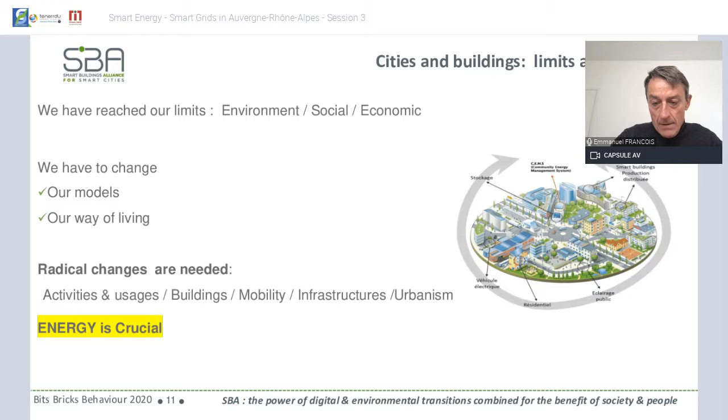In this context, digital is very important and is an opportunity. We are noticing that more and more we are going to a world which is hyper-connected, where every citizen, every building, every mobility, every territory, equipment, infrastructure are connected - not only connected, but interacting with each other in real time. And that's the most important thing, this qualifier: real time.

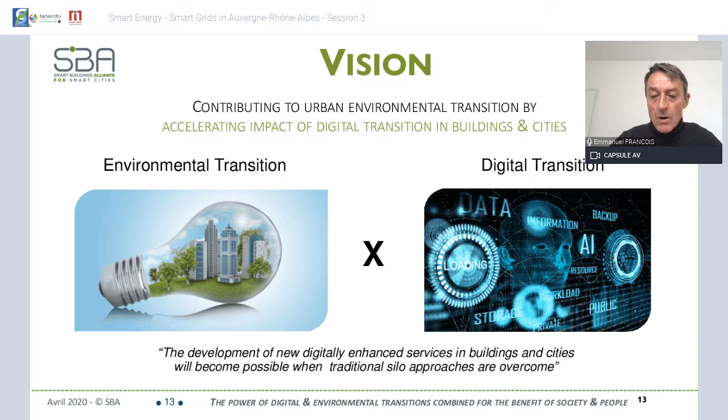Our vision is to support this digital transition and environmental transition. Therefore, we founded SBA as a think tank and also as a do tank. Today, this organization, which is almost unique in the world for its transversality, groups around 500 members in France. And within these 500 members, already 10% are non-resident in France, so that means our ideas, what we are doing, is going abroad our borders.

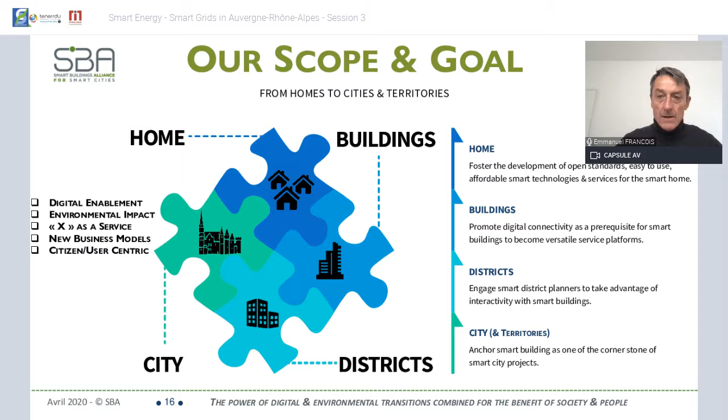So we group cities, architects, installers, equipment makers, telecom, IT, financial industry, industrial players - all these players are sitting together to rethink the building and the city of tomorrow. Our scope concerns not only homes and buildings, but also districts and cities, and how everything is interacting together and how we can rethink a better world by rethinking the building and the cities.

To support this transition, we have a strong organization with three vice presidents - one for smart city, one for smart building, one for smart home - and a general secretary, plus a management office and a board of directors. Some attendants today are also members of this board of directors, such as Frank Fischer.

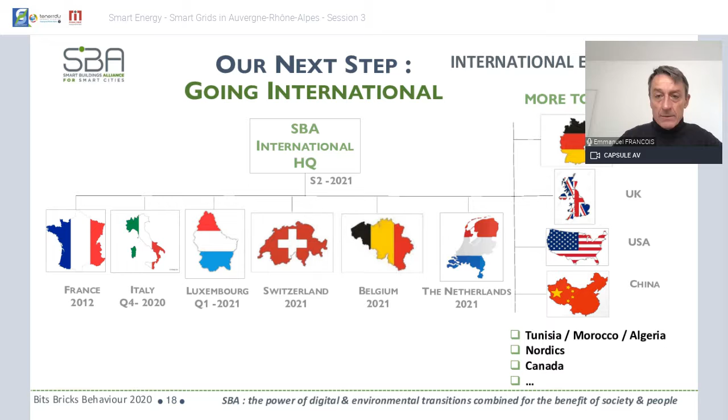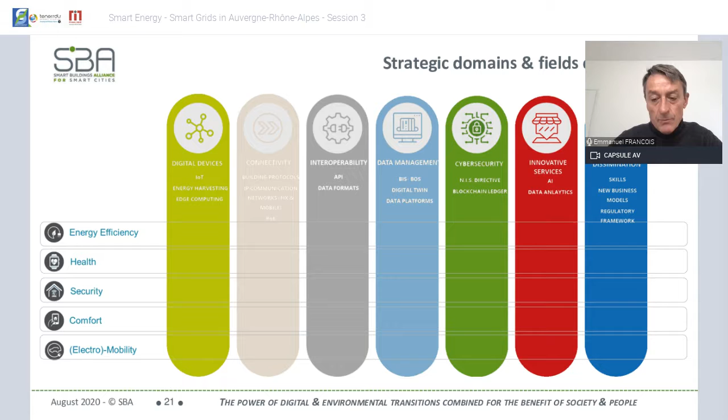But beyond that, the works and goals of SBA deal with energy efficiency, health, security, comfort, electromobility, and for all these fields we are dealing with digital devices, connectivity, interoperability, data management, cybersecurity, innovative services, and dissemination - how we can train all the people, all the stakeholders to support this mutation, this transition, which I call civilization transition.

And for this, we have set up working groups, commissions, first working on the reference framework. The most important is ready to service, and I will talk about it later. And also to work on the digital twin of the building and the cities, the operating system of the smart building and of the smart cities.

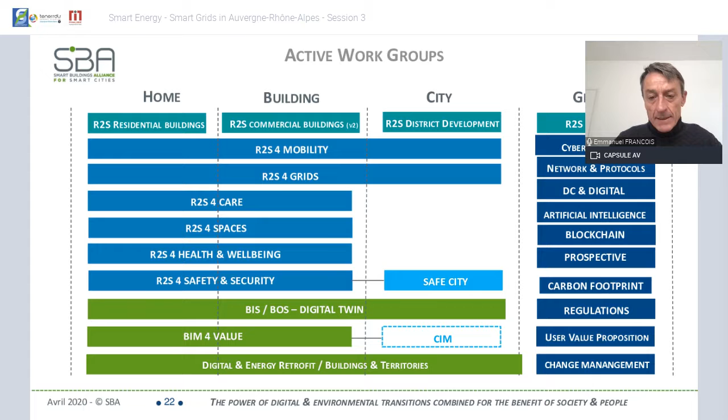Also how we can retrofit existing buildings, existing territories by bringing also digital and transversal commissions such as cybersecurity, networks, DC and digital, artificial intelligence, blockchain, prospective, carbon footprint of digital, regulation - because it's also very important that the law supports this mutation and adapts itself, and the regulations adapt themselves, user value proposition and change management.

So as I told you, we are at the origin of a reference framework which is called ready to service. Why ready to service, R2S? Because we mean that with smart, with the digital, there is a new value to consider in the building and also in the territories. This is a usage value.

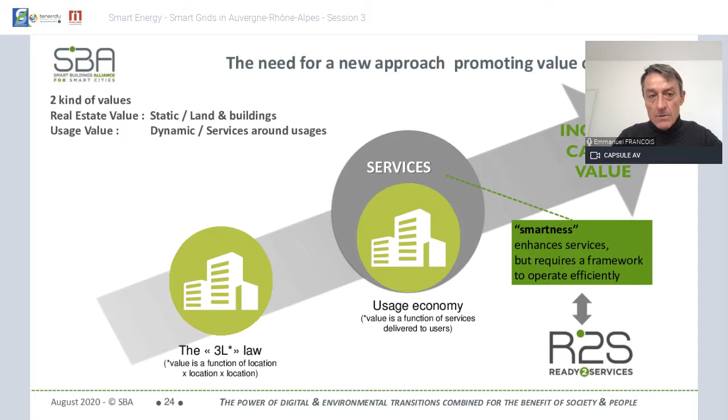So beside the real estate value, which is static, which concerns lands and buildings, you have a usage value, very dynamic, which is linked to the ability of the building and the territories to deliver new services around usages. And it means this is a new economy to adapt. This means also we need to rethink the rules, the regulations around these dynamic usages, and how to consider this value and how to evaluate this value.

So the R2S framework provides more services, concerning also optimization of operation and flexibility of usages. I will go very quickly in the description.

But the ready to service framework, the most important point of this framework is to consider that now there is a new fluid in the building, beside energy, beside electricity, gas, and water. There is a new fluid which is IP, and we need to organize the convergence of all the data on a unique infrastructure, IP infrastructure.

And then what we said also, you have three layers: the infrastructure layer, the equipment layer, and the application layer. And what is very important is that all these layers are independent. That means if you have a solution which deals with equipment, infrastructure, and application, you can remove one or two without removing everything. This is very important because today it's not always the case.

And for this, we describe how these three layers interconnect, and we describe for this purpose the APIs, application programming interfaces, which enable the compatibility and interoperability of all systems together. And we also describe how we can connect the data, how we have access to the data, and how the data are opened.

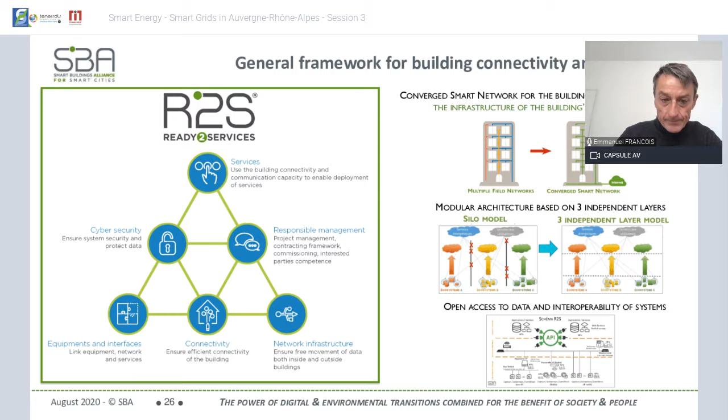This ready-to-service framework is now also supported by Ready to Service R2S Connect. We describe, as I said, the APIs.

Just for your understanding, because maybe it's a little bit abstract, take into consideration a residential building. Today, in certain cases, you have your own internet access, contracting with a telecom operator. That's what we respect. But we say now there is a new network, a network of the building, the digital IP network of the building. And this is independent of your network.

This network supports all the applications concerning the building and also the residential homes for crucial applications such as energy, water, gas, security, and why not assisted living. But this belongs to the building.

That means you can pool all the consumption of the building in terms of water, energy, also collect the data of all the users, and then integrate the building in a smart district, which you cannot do if you have separate housing with separate data and separate operators.

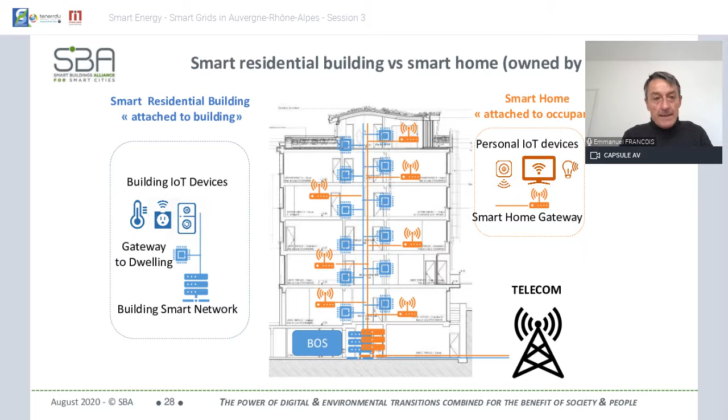So what I'm saying here is quite important and also quite disruptive. But today, as I mentioned, we already have 500 members who are supporting this mutation, and we said yes, we have to do it. Now let's do it together.

So ready to service concerns not only residential buildings, but also commercial buildings and district development. This is, as I said, a reference framework to be applied at every scale. I would say this is a digital trust framework. And of course, it exists, but it can always be improved.

At this occasion, we are already working on a V2, which will be launched this year. That's the reason why we want to share today and tomorrow with you, with other countries, in order to improve this framework so that we can be as efficient and secure as possible, and so that the management of the data becomes more and more secured, and also to ensure trust, not only for the players, but also for the users.

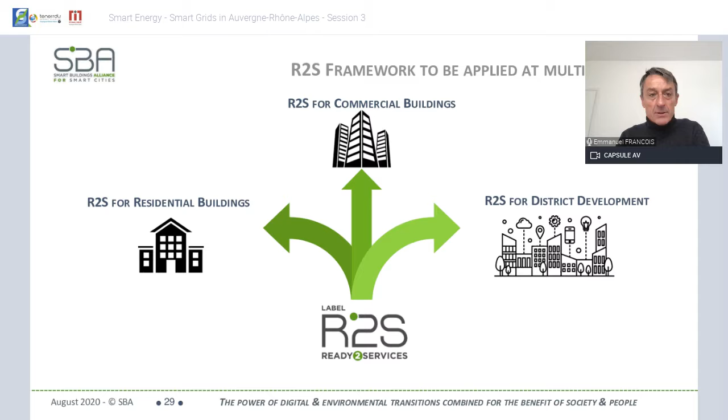When I say services, this is why we say ready to service, because there are services. And these services exist. Today we have listed several services which are key for the building, key for territories. We started with energy services, and for this reason we launched last year Ready to Service for Grids.

This is a declination of the Ready to Service framework, which concerns especially the data concerning energy and how a building inserts itself in a smart grid.

Very, very soon we will launch R2S for mobility, for the energy part, to describe how an electrical vehicle can connect itself to a smart building and how we can manage the charging point.

But also we are working on R2S for spaces, for optimization of spaces. That means a space in a building has to be mutualized, pooled within all the buildings and also within a district. And the same for safety, health, assisted living, personal care. Also, recently we will work on signage, signalization, user well-being, and so on.

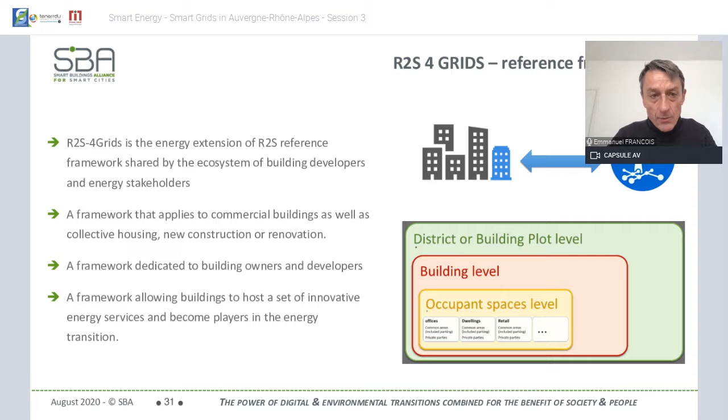So for Ready to Service for Grids, I will switch very rapidly, but what is important, we have described 3 levels of the building. The first level is how the building is connected and shares data with its environment and how we receive the consumption information. The second is how a building is reliable, meaning how the energy production and consumption data are reliable and stick to objectives.

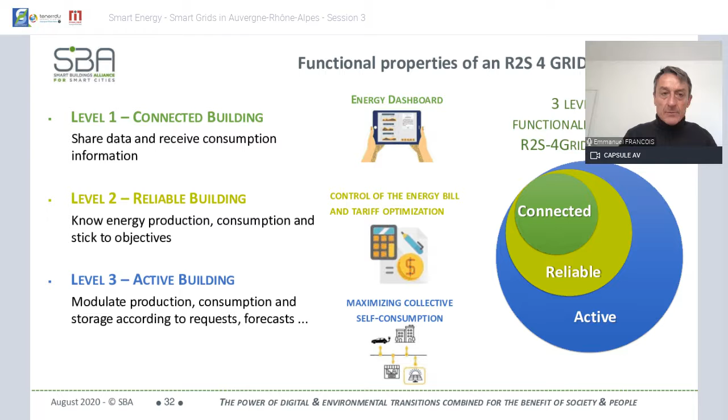And the third one is active buildings. That means how this building interacts with a smart district, a smart grid, and how it can adjust its consumption to the consumption of a district.

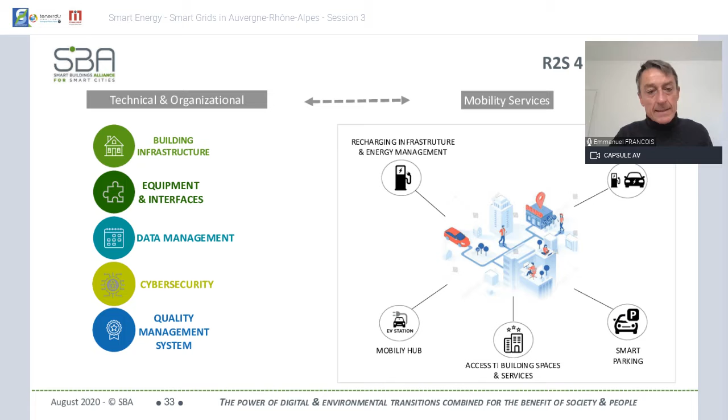Recently, as I told you, we will launch ready to service for mobility. This goes in the same way with data management, cybersecurity, quality management system. And what is quite important, we are launching a new concept, which is EV score, electrical vehicle score.

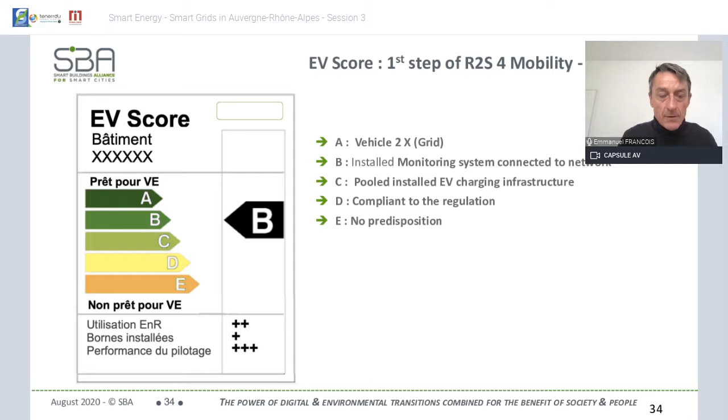We are working also, of course, on ready to service for district. I will switch, but in this framework, we are just... Sorry. And of course, we are also working on the description of the data, the building operating system.

Which is quite important. Our target is at the end to describe the digital twin with convergence between the static data of the building and the dynamic data of the building, and to have a global overview in real time of the building and the district for all the services.

I will just switch very quickly, but this was also a topic I wanted to highlight because the topic of today is energy, and I have the conviction that we need to go to hybrid networks for every network, and I would say more hybrid equipment, hybrid building. So, but let's start with networks.

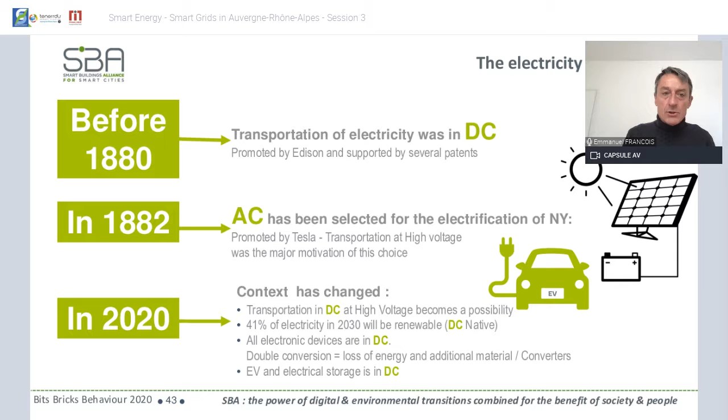And if we want to answer to the current challenges in terms of climate, in terms of GES, I think switching to DC is not a utopia. It's just a need, and we need to have it in plan for the next 10 years.

And as you see, hybrid AC-DC electrical networks is already a concept emerging in the heads of several countries, in the head of several universities, as in Netherlands, the University of Delft. But what I think, and I spoke about it to the European Commission, I think it's time now to have a European plan for how we can progressively switch to DC. That means to have a hybrid AC-DC electrical distribution, and especially with digitalization.

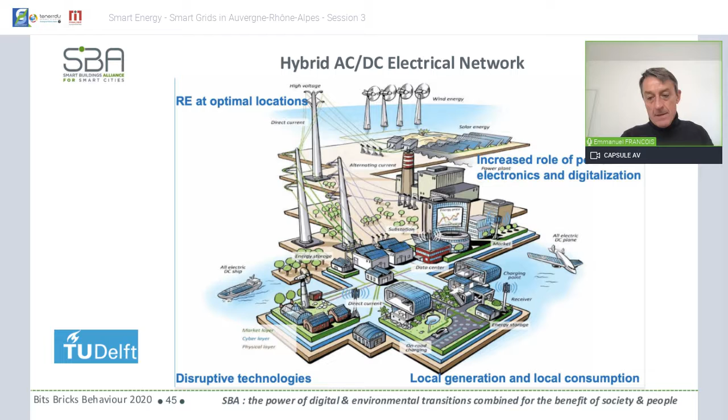That means as we are deploying digital in every building and every territory, at the same time, we need to deploy also this DC network. So that's my vision I wanted to share at this occasion, and I hope you will receive it positively.

And just to highlight it, my vision is not only energy, but also water. As you know, today there is a huge problem with water, and in the next 10 years we will have everywhere in Europe problems with water. And as you know, only 10% of the water we are using is for drinking, we need to rethink the water networks and to have a hybrid network, one for water we drink and another one for usage water. And the same also for waste.

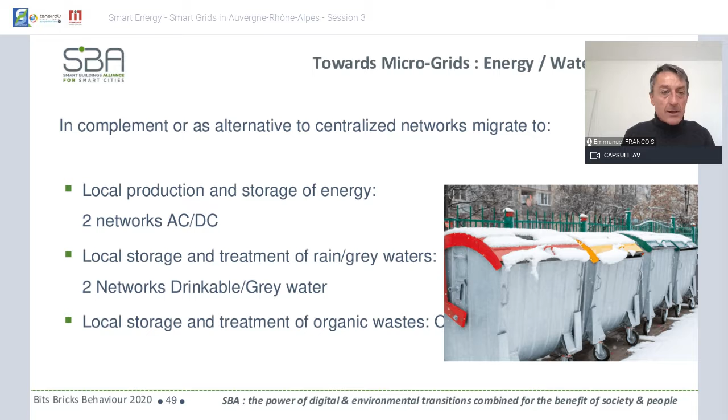We need to have a local store and local treatment of some wastes. So I think this is a new way of living, and for this we can provide it just because we are sharing data, and this data we are collecting locally, and then we have a local governance of these hybrid networks we can manage locally for more efficiency.

This is a vision I wanted to share with you, and now I would like to answer your questions very rapidly. But this vision is just to move to more sustainable territories, with more diversity, more proximity, and more frugality. Thank you.

Thank you, Emmanuel, for your presentation, which went from electrical network to a much broader range of topics, including water and waste. So I see that you are looking at all the aspects of a smart city, not only energy.

We had one question in the chat, which is displayed on the screen now. Is the reference architecture documentation available? Yes, so maybe if you can send a link on the chat where people can access this information, I guess on your website probably? Yes, on our website, and also on the website for smart building. You can find it also on the website of Certivea. But if you can write it on the chat later. Yes, I will do it. No problem.

Okay, another question from Frédéric Lux. Which services are you offering your members? Our members, the services. Yeah, the 500 members you mentioned, I guess.

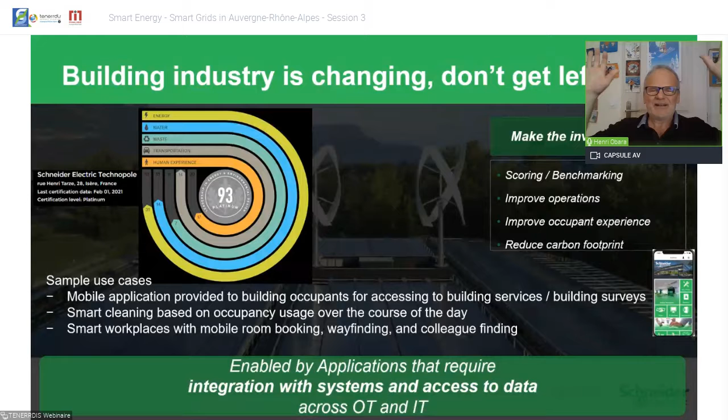Can you go back to the previous slide? So what we call today within Schneider building of the future is that we have the vision of an all digital and all electrical world, and this will be applied to our building offers and solutions. This is enabled today thanks to the convergence and integration, as mentioned many times by Emmanuel, between the IT and OT.

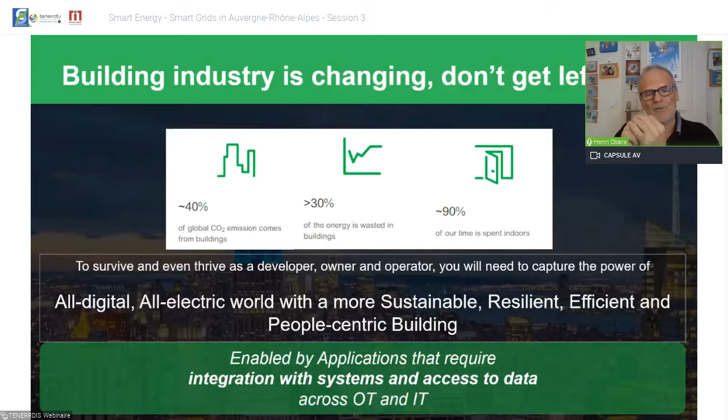What can we think and how can we do that? We have learned many things today from Emmanuel's presentation about electrification, DCs that's coming up and showing up, but also when buildings are in fact constructed and start the operation phase. That's where the effort must be sustained to reduce the impact. How can we do that? We do that by managing energy, of course. That's the primary, I would say, impact of a building's consumption. But not only energy - buildings consume water and generate waste, but also to go to the building, and that's another dimension of a building, the transportation shall be addressed.

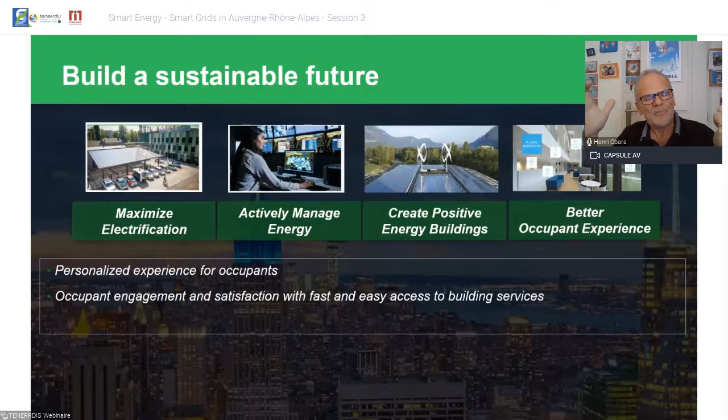And also together with city planners and city transportation organizations, we should also think of new ways of mobility. So today we will address all of these topics in one single vision, and I guess maybe some of you know what I will be referring to as what could be the result of a smart building - that means how can we make building efficiency, building environmental performance visible. Please, the next slide.

This is one of the ways we chose for at least our 2 buildings in Grenoble. We'll see those 2 buildings later on. On the left side of the slide, you see a kind of racetrack. This was the accomplishment of Schneider Technopole building, which is not that far from Tenerrdis location. And what you see is that the building achieved a very high level of performance according to this well-known international rating system, which is LEED. What does that mean? Not only do we make the data of the building visible and accessible, but we can demonstrate, benchmark, score, and improve all the building portfolio of the world, and rank that building according to a rating system.

Again, we choose the LEED approach because to date, these are the only ones that allow and provide a scoring function based on data sharing. And this is the story I will be telling you in detail later on.

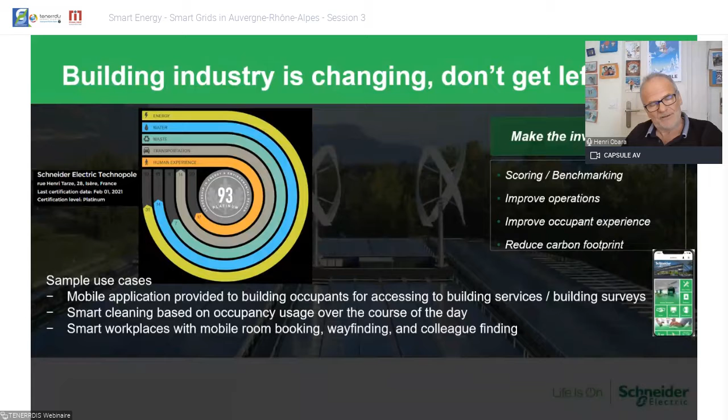That's the Technopole building, as you can discover it when you come to Grenoble by train - you'll be able to identify it very easily. It's showing its PV facade, which might be quite a strange way to install PV, because PV on the facade are not that much efficient. But still, these two facades - the south facade, and the southwest facade - you might imagine that it's not producing that much energy. Yeah, you're right, it's more an architect's touch, I would say, around the building. But still, these facades generate a little bit of the share of the energy consumed by that building.

So, what was the achievement? What was the project about? How did we start that? We started, in fact, because we were the owner of those buildings - Technopole campus is a set of different buildings. We started a project from scratch, meaning that located on this campus, there was demolition ongoing to prepare the field for constructing these two buildings, so the lab part and the office part. The office part is the white PV facade building. And we started and entered into the project by selecting an architect, transferring and writing our requirements to the design team, and also selecting the construction company that would take care of the building part of that project.

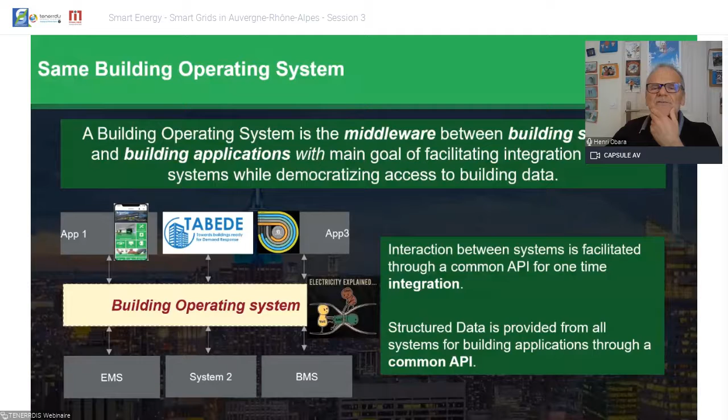How can I share my screen? Just a hint, please, guys. Quentin, Ingrid, can you help me sharing my screen? Yes, Henri, normally you have the possibility to share your screen with the red button, which is just under the window where you can see me. I don't see this button, I guess. Ah, yeah, I guess it. Okay, fine. Thank you. Okay.

Let's run for this live session now. So there are a couple of windows open, and we will start from the end of the story. This is what I share with you, and I hope it will be running. This is a live animated scoring function of what I show you statically on the slides. So the scoring, I hope it will run.

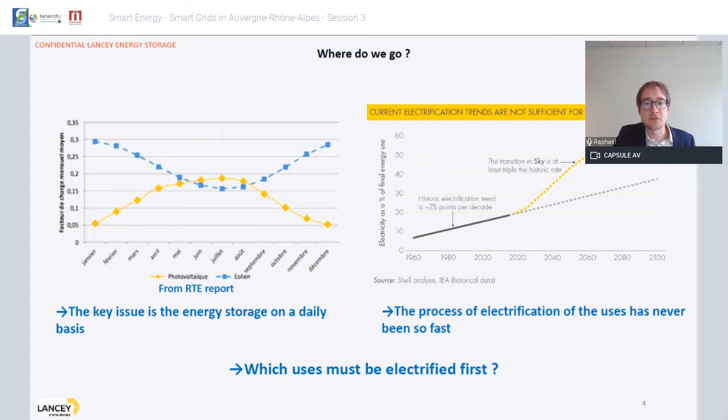But what they show is that they postulate this share will reach 60% by a future date, meaning the majority of final uses would be covered by electricity. It means that over the coming decades we're going to have an electrification process that has never been so fast in history — even at the beginning of the 20th century, electrification was not going at that speed. So clearly the question is, what kind of uses must be electrified first? We consider that the EV car actually is not necessarily the main use, and I will come back on this.

We have this other graph, which is pretty alarming actually. It shows that 75% of European buildings are at label D or inferior in terms of energy performance. That's pretty alarming, because if we want to reach carbon neutrality, we should be at label A.

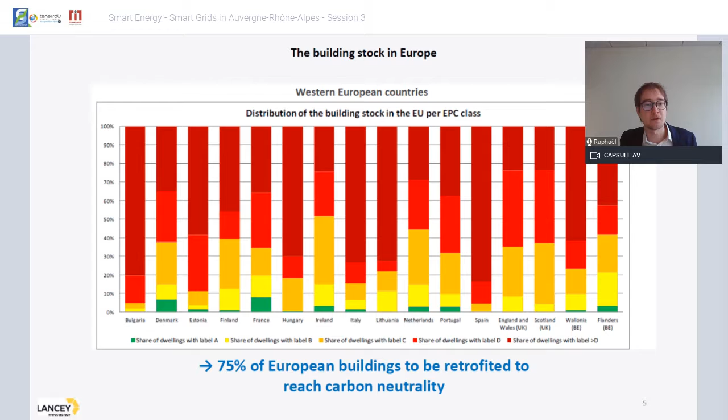So that shows you a bit the scale of the retrofit to be led in the coming decades in Europe, to put those dwellings in the right category. France actually is not that bad in terms of label A, we're actually number one or number two in Europe. But the problem is not the new buildings, the problem is really the retrofit, and you can probably imagine thousands of billions of euros to be invested into those retrofit operations.

And the key aspect will be about the user acceptance. If we study a bit in terms of CO2 emissions, what's the main actually emitter in Europe? It's not transportation, actually it's heating and cooling. And in Europe, it's mainly heating, of course. So clearly it's a serious issue that we have to pay attention to.

Maybe it's a less sexy subject, if you will, of the energy transition. It's not an ego vector like a brand new SUV electric or plug-in hybrid, but actually in terms of CO2 weight, it's more urgent to be electrified or to be carbon neutral than transportation.

And that's probably why we have more and more countries that are actually getting rid of the gas boiler into the new building. Netherlands was the first country in 2018 to go in that sense. France actually entered this club by 2021. And Germany planned to do this by 2030. Germany right now is clearly the country of the gas boiler. And there is this study of Fraunhofer, postulating that there need to be 5 to 6 million of dwellings by 2030 to be electrified for the heat generation in Germany.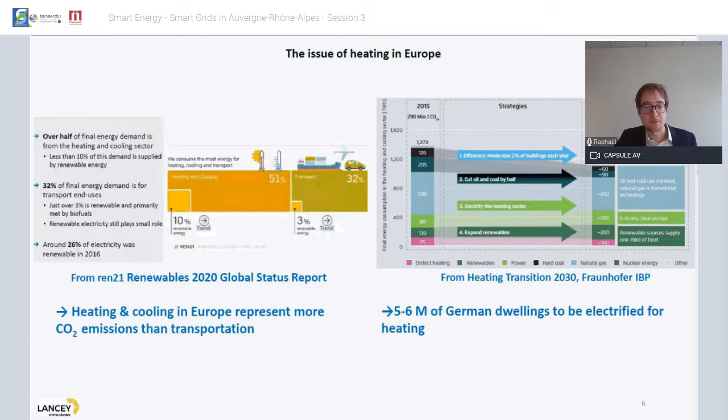So probably at this stage, you know my point. We have to electrify the heating, and we have to do it in a way that we create some resilience for the end users. We have this yellow jacket effect that is pretty well known right now, which is that if you don't provide the right transitions and the possibility for people to adapt themselves to the change, for instance of regulation regarding the carbon taxes...

That was, if you remember, the initiation of the yellow jacket process. And you can imagine plenty of those bad side effects where actually people will prefer to refuse the change or to even deny the change rather than, of course, following the move. So it's not easy at all, of course not.

But it means we have to consider, we have to have in mind different kind of options to adapt to the wide varieties, of course, of those buildings to be retrofitted in Europe. And at Lancey, we have developed a product that, in our mind, can be very, very performing for at least one part of the use cases of the individual dwellings to be retrofitted.

You have only 5 minutes left, Raphael. Wow, okay, I will accelerate a bit. Sorry for that, too long for the introduction.

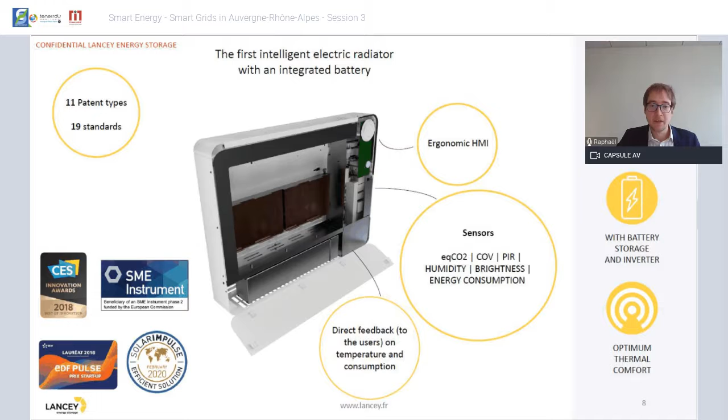What we imagine with this product is that kind of configuration. So it's not only the Lancey Capella, our heating system alone, it's infrastructure. It's a complete solution with different of those systems, with a link to the smart meter that we have been working on since 2018 directly with Enedis.

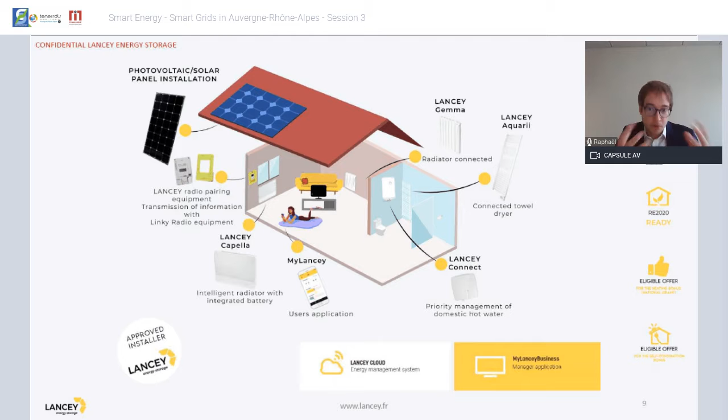And of course this PV photovoltaics installation onto the rooftop or in the neighborhood, imagining the same single solution in self-consumption with as much as possible a local production and local consumption through the storage capacity of our devices, in a view of having it run as efficiently as possible to reduce the heating bill, first thing, to create more resiliency for the end users, to reduce carbon emissions, and to open new kinds of services like grid services, demand response, frequency containment reserve. I will come back on that.

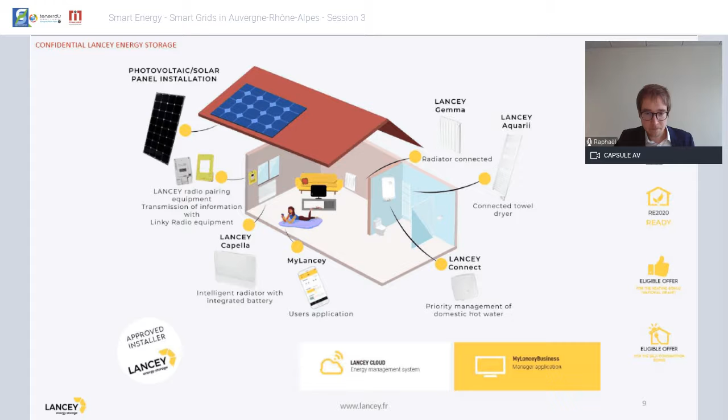We have developed the full package of application. You have the front-end part with the end-user app, but you also have a back-end part which deals with model predictive control on different aspects.

The idea is to have the opportunity of treating different layers of constraints. Some constraints come directly from the house, from the end user, in order to fulfill the level of comfort. But some constraints can be completely external to the dwellings, like constraints from the grid, the weather forecast, the availability of renewables in the coming hours or days, the CO2 emissions, and why not in the near future, some constraints coming from an energy community with other sources of production and consumption.

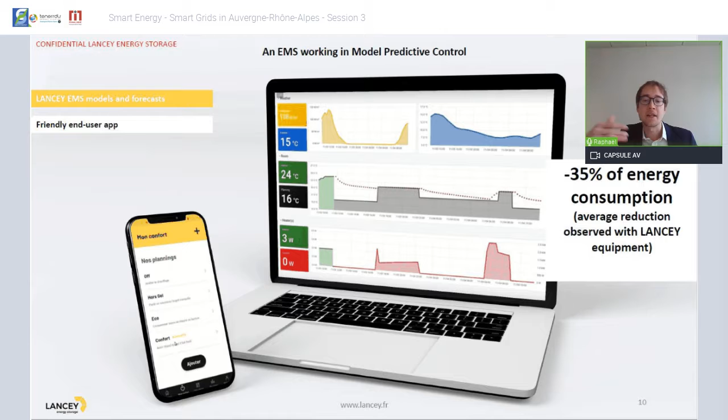The main part at day one is to be very efficient regarding the heating generation, which is, as we said at the beginning, a main source of CO2 emissions and of the heating bill at the end of the day. But that also makes a system that can be adapted over the years to the change of regulation and to more and more complexity, and that's into the end one part of the smart grid.

One thing to have in mind regarding what's interesting in the Lancey approach to storage, but of course you can duplicate this to other kinds of uses, is the fact that normally in a traditional storage system, you have of course the battery pack by itself, but you also have different parts around it which we call the balance of plant. Basically a battery by itself is DC, low voltage, you can't do much with that directly. You have to use an inverter to control temperature, to make an energy and battery management system, etc.

That costs quite a lot. Actually, that can be up to 50% of the total cost of storage. And that's even more considering a behind-the-meter approach, like Lancey is. If you embed the battery directly into the final use, you will reduce those associated costs with the storage.

And typically, you can find the same kind of advantages with the electric vehicle to grid approach, and that can be interesting to reduce the levelized cost of the storage. That's clearly one advantage of the Lancey approach. Another advantage of this approach is the fact that, considering rather small batteries, we can consider different kinds of sources to imagine a second life of batteries quite easily.

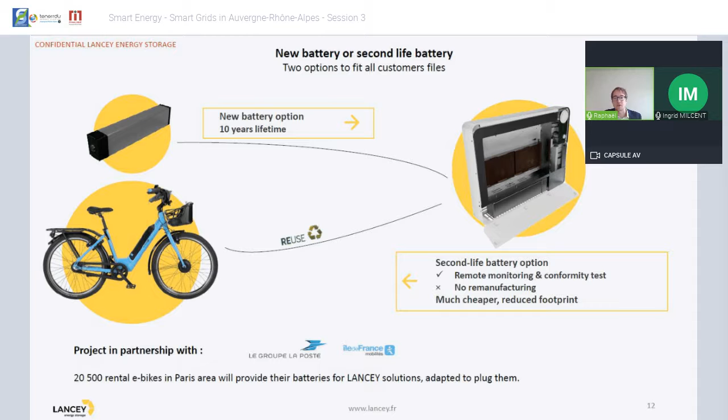And of course, part of the solution to the issues that batteries can have, like many renewables, are the raw materials consumption and all those rare materials that we have to use for the moment.

Sorry Raphael, can you wrap up please? Yes, that's my final slide, and then I'm finished. Sorry for that.

Clearly, what we want to participate in and are looking for partners to collaborate with is imagining the step further, where we can shape and go above the single house or the single flat, and go onto a larger scale, like a group of dwellings, a group of buildings in a collective self-consumption configuration, or an energy community, imagining that we can create additional resilience and additional value to local electricity production with more sources and more possibilities of consumption on site, and how it can be both profitable, scalable, and carbon neutral.

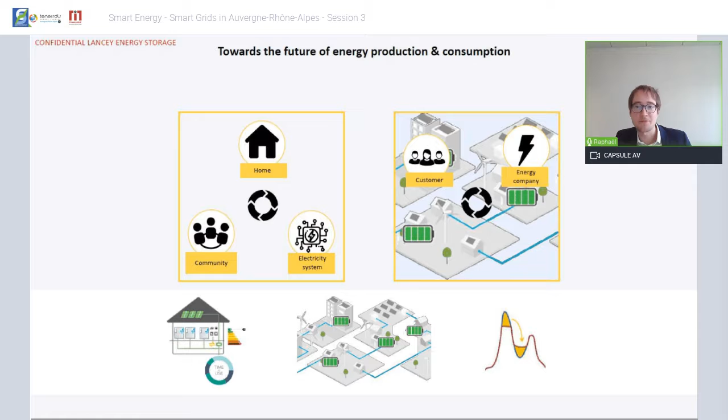And clearly, if you, dear audience, have some interest in joining our conversation, you're most welcome. Thanks a lot, I was a bit too long, sorry for that. Don't know if you have some questions.

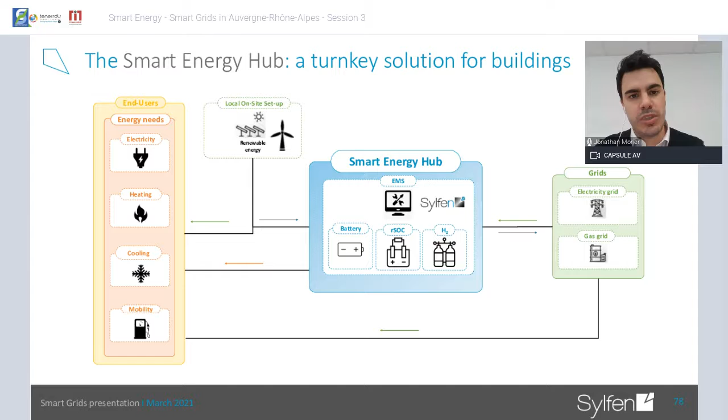As I mentioned, the heart of the SmartEnergy Hub is this reversible solid oxide cell. For those who don't know, it's basically a 2-in-1 electrolyzer and fuel cell — two different modes. Whenever the hub is in electrolyzer mode, it absorbs the surplus electricity being produced and converts that into the production of hydrogen.

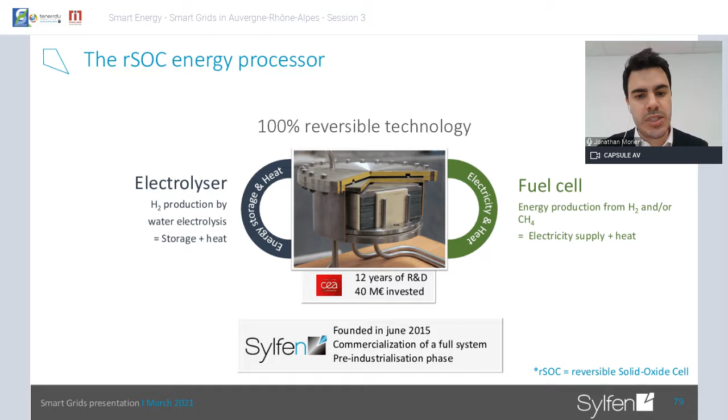In the other way, whenever it's in fuel cell mode, we have the consumption of that hydrogen that's been produced, and that's converted into electricity and heat. The idea is to provide that energy back to the building.

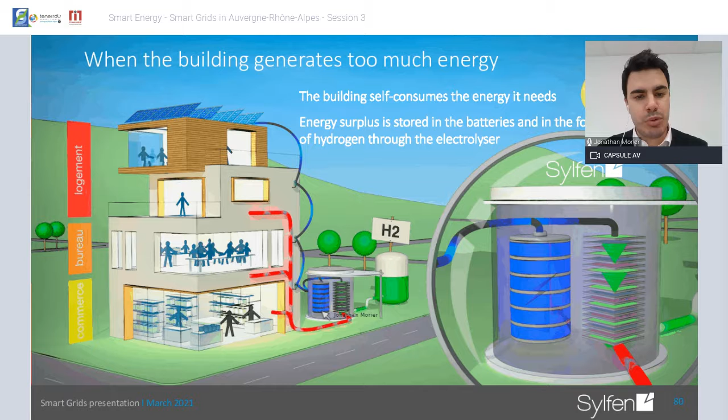In a nutshell, in a diagram, you have a building with some source of renewable energy production. The solar panels provide much of the electricity for the building, and whatever is not consumed right away goes into the SmartEnergy Hub, made up of the batteries represented in blue, and then that energy processor in green.

Whenever during the day there is a surplus, and whenever there is not enough energy, that SmartEnergy Hub will give back that energy in the form of electricity and heat.

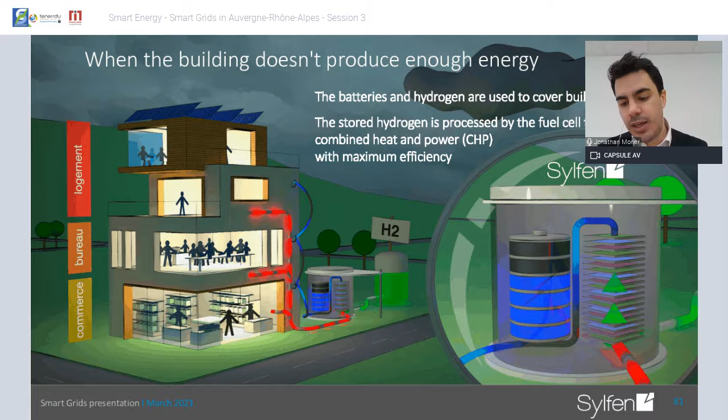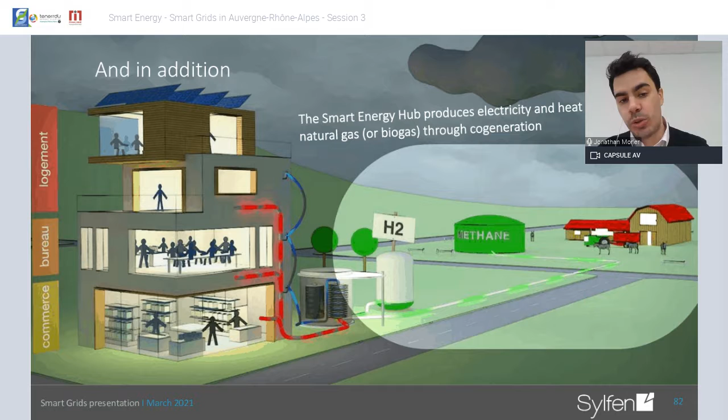One of the particularities of our technology is that whenever the stocks of hydrogen are completely depleted, we always have the possibility of running our SmartEnergy Hub as a fuel cell and cogeneration unit using natural gas. If we can use biogas, that's even better because we reduce emissions. The point is that we're able to increase flexibility whenever there is not enough solar production to produce enough hydrogen.

This slide shows the various specifications in terms of power and storage capacity. On the battery side, we use lithium-ion batteries in 50 kilowatt-hour modules, and our solution is completely modular. We can put one module, just like we can put 5, 10, etc. It's customizable based on the site.

On the hydrogen side, the electrolyzer we use — the 2-in-1 electrolyzer and fuel cell — whenever it's in electrolyzer mode, can absorb up to 40 kilowatts per module, and that will produce 800 grams of hydrogen per hour. Whenever it's in fuel cell mode, it will deliver to the building 6 kilowatts per module of electrical power and 4 kilowatts of thermal power.

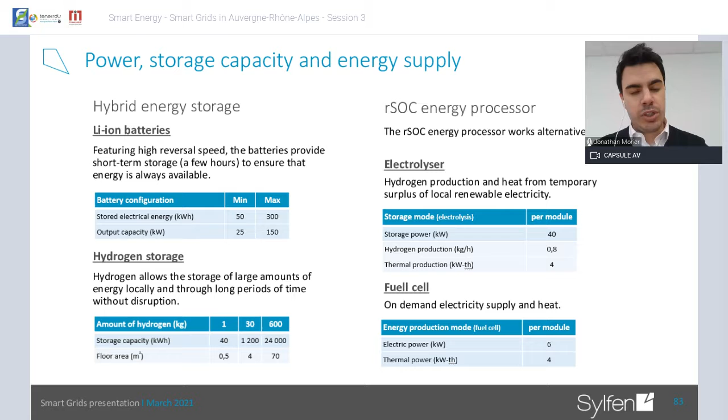Again, we're a multi-energy solution, providing electricity, heat, and hydrogen as well, if we're going to explore hydrogen mobility at a later time, and we're starting to on some projects.

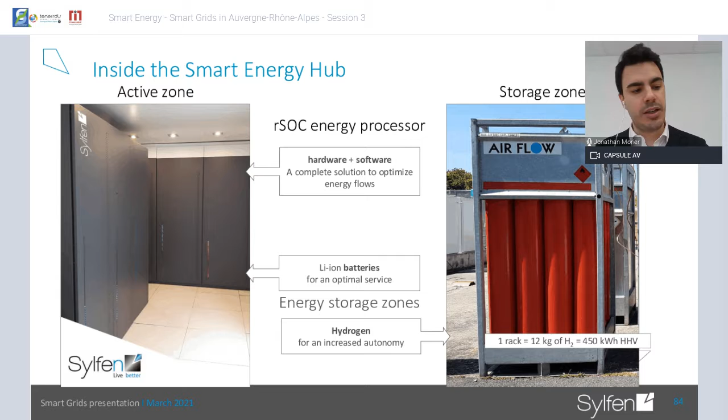This is what it looks like. We have two zones. One zone is the active zone, which comprises the hardware and software usually installed in boiler rooms within the actual building. Then we have the storage of the hydrogen, which looks like these B50 bottles within racks, and that's again completely customizable. That sits outside the building for security purposes.

We're targeting all types of buildings. Today, our product offering is really focused on buildings that are 1,000 to 10,000 square meters, whether they're existing buildings or new buildings.

Given the nature of our innovative solution, most of our projects are new buildings, but there is definitely the possibility to work on existing buildings. There just needs to be enough space to install our solution, which can be a few square meters within a boiler room. We are working at the same time on a new line of product, which will be 10 times more powerful. So we're looking at 400 kilowatts of absorption in electrolyzer mode and delivering 50 kilowatts in fuel cell mode. And that's more geared towards bigger campuses such as universities, hospitals, industrial parks, etc.

Just a quick three of them. One of them is where we are located, and two others are in Italy, one in Turin and one in Procida, which is a small island off the coast of Naples. I'll talk a little bit more about that one.

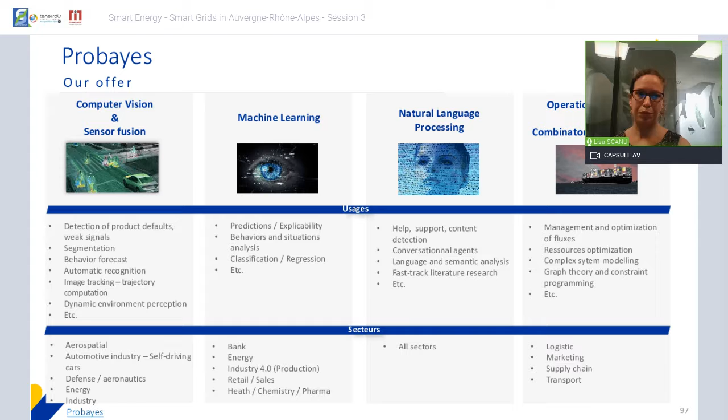The first is computer vision and sensor fusion, mainly used in the automotive industry and self-driving cars. We also have expertise in conventional machine learning, which can be applied in many different areas such as banking, energy, industry, etc. We have a team expert in natural language processing, working amongst other things in chatbots. Finally, we have a team specialized in operational research and combinatorial optimization, which mainly intervenes in logistics and supply chain. But today, I will be talking about BatiSense, a product to optimize the energy consumption of buildings, based on these 4 areas of expertise.

BatiSense is a tool to automatically model the building, taking into account the weather forecast in order to optimize the heating and cooling of a building. It goes until the remote control of energy equipment.

Before its commercialization in 2013, we worked 3 years in internal research and development on this product. We have 2 patents, one on the automatic learning of the model and one on the forecast of external gains. And it received several labels and awards, such as the label Energized by Tenerrdis and more recently the Solar Impulse Efficient Solution label.

The main competitive advantage of our solution is that it is a non-intrusive solution adapted to existing buildings. It can, of course, take into account the external gains, but more importantly, it can automatically control the energy equipment in order to increase occupant comfort and decrease energy consumption.

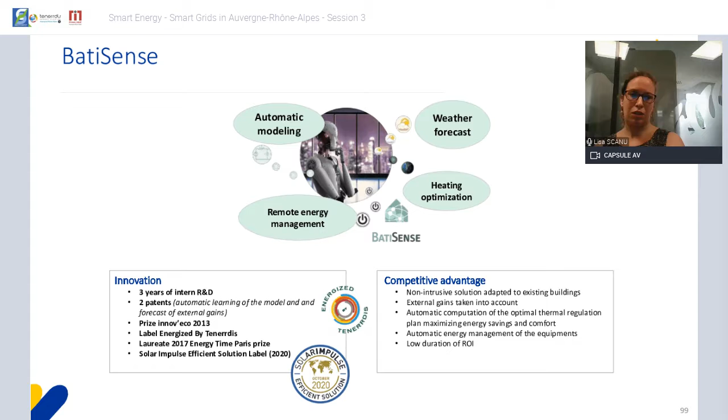Currently, the solution is mainly used for the building itself. The main need from the clients we receive is either to minimize the amount of energy required or to minimize the financial cost of energy consumption.

But I strongly believe that a big advantage of our solution is that we can act on the definition of a cost function in order to take into account many different phenomena. And it can be a huge asset for a smart grid, in that we can integrate power capping constraints or integration of storage in order to optimize auto-consumption, for example.

We can also take into account several specificities of the energy market in order to add some revenues for the clients. So it is really easy in this product to change this cost function and to make the building an asset.

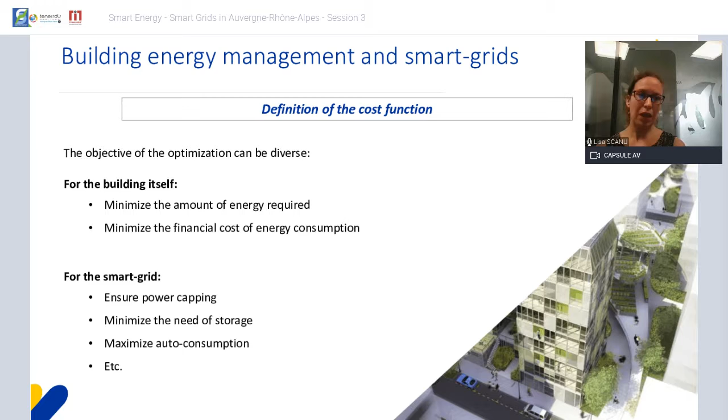How does it work? The first step will be to model and calibrate our model. So we will divide the building into different thermal zones, and for each of these zones we will apply a simplified model, which is an analogy of an electric circuit.

Each of these zones will be equipped with sensors, really simple sensors such as indoor temperature or energy consumption sensors. For the first month, the only thing will be collecting data. After 1 month, we have enough data to learn the parameters of our model.

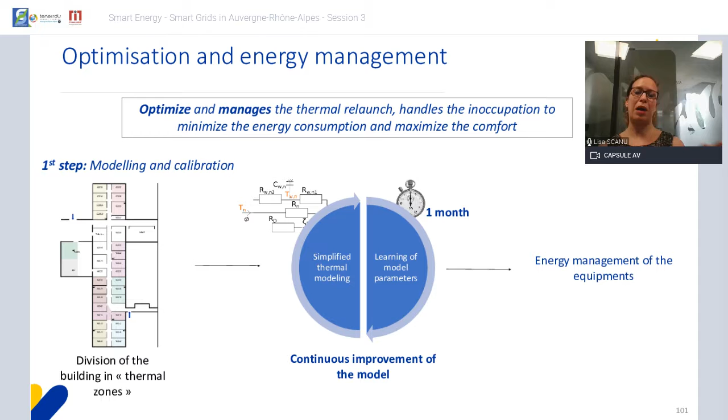And then we can go to the energy management part. This is the second step. Our client will only give us information about its occupancy agenda. Then we will still have our sensors on site and continue to collect data.

And if we want to introduce in our objective functions some information about financial energy contracts or the energy market, we will need to have the information about that. All this information will go first into the thermal behavior forecast, which we just calibrated.

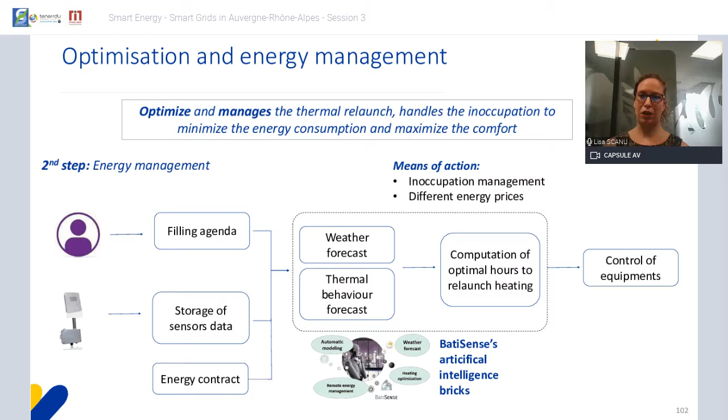And then we also have another brick, which is called weather forecast. In this brick, we won't do the weather forecast itself, but we will collect it. And then we will kind of locate it on this building by a second learning phase, where we adapt the weather forecasts to a building thanks to exterior temperature and the thermal behavior of the building. When we have calibrated everything, we are able to compute the optimal hours to relaunch the heating systems and to control the equipment.

Of course, our solution is aimed to be autonomous, but we couldn't install sensors on buildings and not give our clients some way to visualize the data we were collecting. So we developed a simple data visualization web application where we can find the different data we collect on site: indoor temperature, exterior temperature, power, heating power or cooling power, the agenda, and presence if applicable.

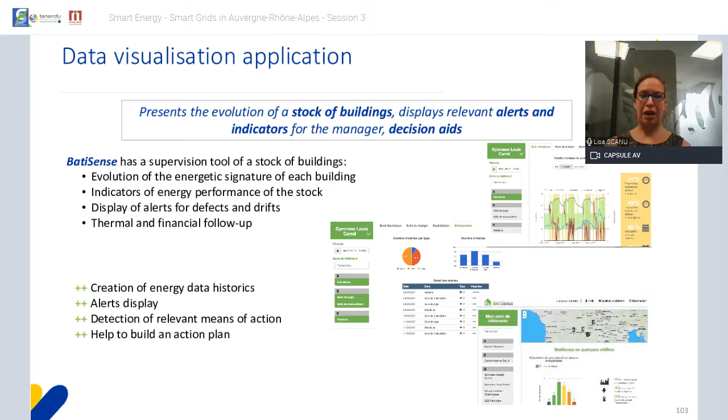Then we also have different information about different alerts or indicators to give a quick display of the state of the building. Then I will just give two quick illustrations of some results we got with this product.

The first one is our historic client, the city of Seyssinet-Pariset, which is a small city around Grenoble, but which had since 2005 already high objectives in energy savings and CO2 emissions. But they didn't have a lot of financial and human resources, so they needed to pursue the approach and increase the gains without heavy investments.

For us, it was easy in the way that the users and inhabitants were made aware and the city's engagement was really high. But on the opposite side, the problem was that there were old buildings with no instrumentation at all, and even the occupation agenda of buildings was only partially known. We first installed our solution on two buildings, a sport hall and a school.

For the first year, we had a very high return on investment because we had like 40% of energy savings for the sport hall. But those are the results 4 years later, because the solution allowed us to identify several problems that could have been replaced and corrected.

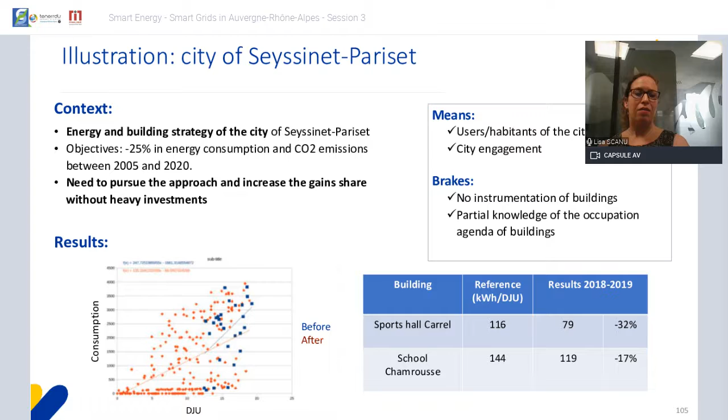The other example I like to give is the Woopa building. It's very different from the buildings equipped in Seyssinet-Pariset because it's a really recent building, built in 2013 if I'm not mistaken, and it was considered occupied by building thermal engineers. The objective of this building was to be an energy positive building.

But the problem was that they had installed an active slab, which has a lot of inertia, and the building was equipped with a lot of windows, so it was very sensitive to solar gains. The energy manager on site didn't succeed to balance these two aspects. For us, it was really easy to install a solution because the building was already over-instrumented, we didn't add any sensors because everything was already here. But we were really skeptical on the profit we could make because we were used to old buildings.

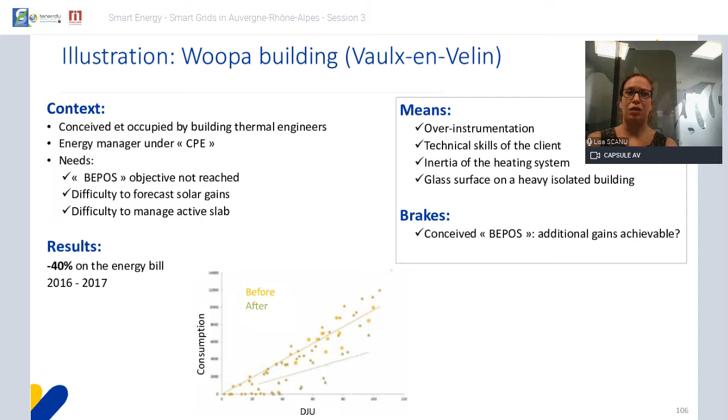And still, on the first year of installation, we reached 40% of savings on the energy bill. And more importantly, we increased a lot the thermal comfort of the occupants.

To conclude, I will give some updates on the current state of development of our product. On the technical point of view, the product has been commercialized since 2013. We have different returns of experience, and we reach 15 to 40% of energy savings on all the buildings equipped.

On the commercial point of view, the next step is scaling up. Probayes does not intend to commercialize applications which require such scaling up in a specific field. We really want to keep a wide view on different sectors and different technologies of artificial intelligence. That's why we are looking for a partner, such as facility management companies or others, to help us in the commercialization of bâtissons.

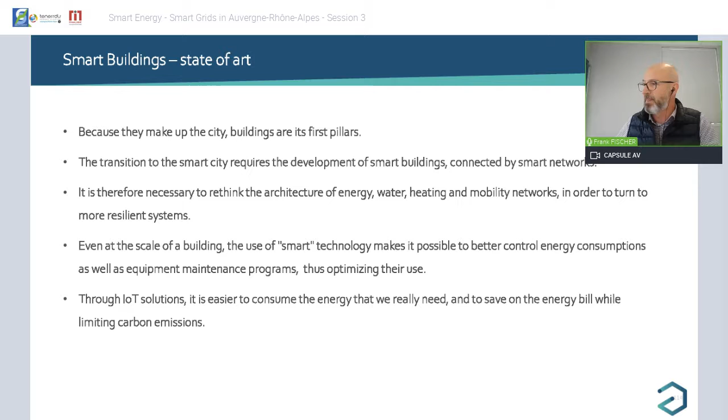The big challenge of our century is to decrease fossil energy use and increase renewable energies within the framework of climate constraints. Smart buildings connected to smart grids can significantly contribute to these objectives. As I told you, buildings are the biggest consumers of energy in the electrical grid and could be among the greatest producers of renewable energy, especially thanks to the concept of energy positive buildings, while also offering high flexibility in energy demand.

In addition, the European regulatory and normative framework is becoming more and more coercive and requires rapid, effective action with a real return on investment. So I'd like to show you some examples of what can be done in a smart building. Our solution allows us to optimize the energy performance and maintenance of buildings while improving the comfort of occupants.

If we are talking about the value chain, Unissent is focused on the beginning of the value chain. We manufacture sensors, we run connectivity through public or private networks, and we ensure secure and reliable data delivery to our customers and partners, which can be facility managers, social landlords, property managers, and city managers.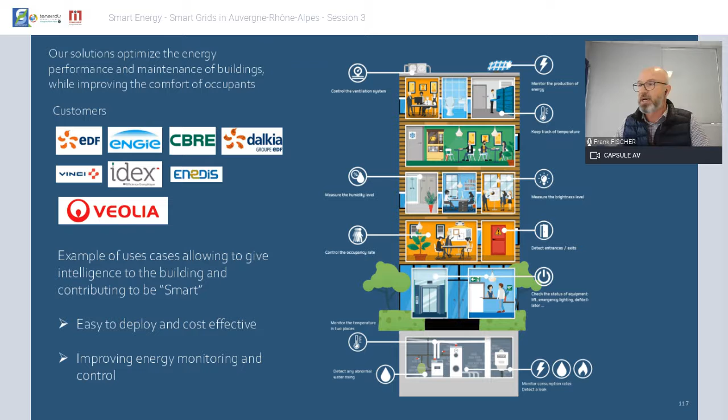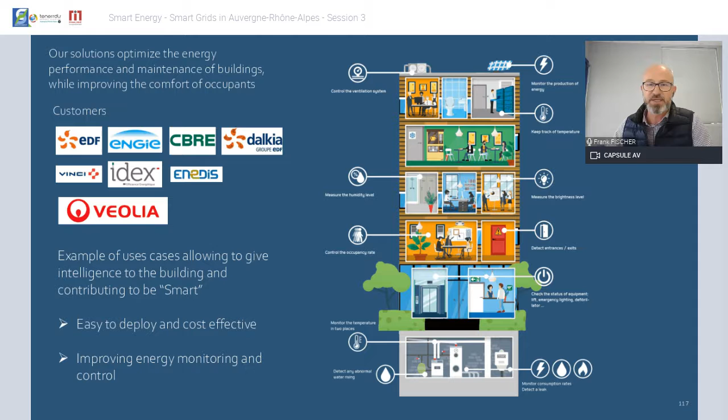We have thousands of use cases deployed with our customers, especially in buildings, but I have chosen two of these use cases to illustrate what can be done through IoT solutions. The first use case is energy consumption monitoring.

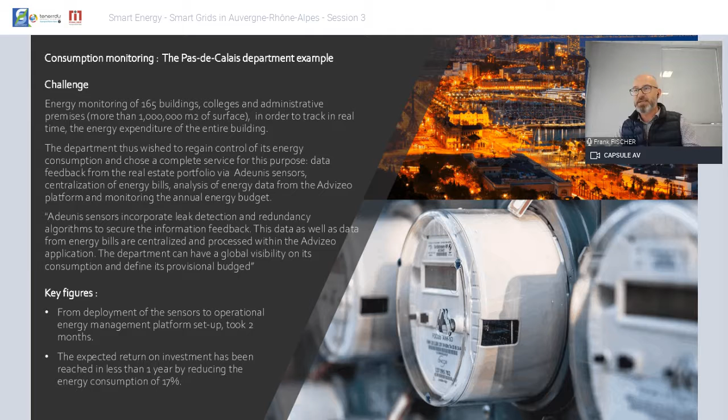Our customer in this case is the Pas-de-Calais department, located in the north of France. The challenge was simple: the Pas-de-Calais department must remotely read the consumption of 165 administrative buildings and colleges under its supervision. It's a project of very considerable scale, representing more than 1 million square meters of surface area to be equipped. The department wished to regain control of its energy consumption and chose a complete service for this purpose.

This included data feedback from the real estate portfolio using Adeunis sensors, centralization of energy bills, and analysis of energy data. We ran this use case with one of our partners, Advizeo, which runs a platform for monitoring energy. The solution has been deployed to collect energy data from all 165 buildings.

And it was including, of course, IoT sensors and the main platform from Advizeo. So if we focus on the key figures of this development, one of the main interests of the IoT solution is the deployment from sensor to operational energy management platform. It took only 2 months to deploy because it's not intrusive. We don't have to install everything by running existing systems. We just deploy a simple system based on a wireless solution, mixing public and private networks in this case.

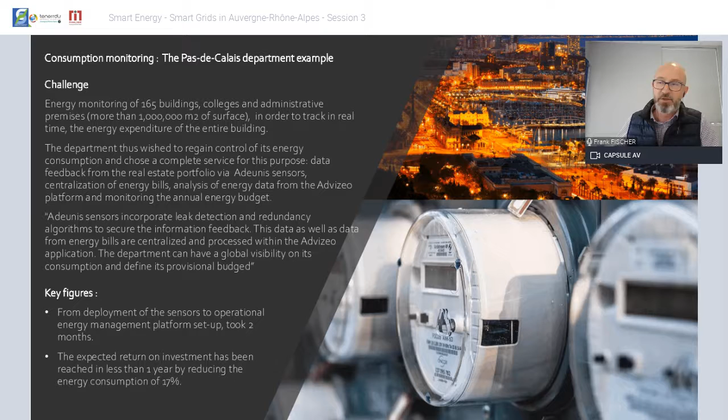Now we are working with the department on other subjects such as air quality and maintenance of equipment in the building. The second use case I'd like to show is focused on solar panel monitoring, done with another partner, Texol. The objective was to detect in real time a failure with the thermal or photovoltaic installation in order to optimize production of solar energy and reduce consumption.

As you may know, whether thermal or photovoltaic, solar energy is on the rise, and its use continues to increase over the years. Just to give an example, the increase in photovoltaic production was 11% between 2008 and 2019, and my guess is it will continue to increase.

Today, solar installations are often used in addition to conventional energies. Therefore, if a failure occurs, it cannot be detected since the building is still powered from elsewhere. Detecting a failure is essential to avoid shutdowns of the installation and the resulting financial losses.

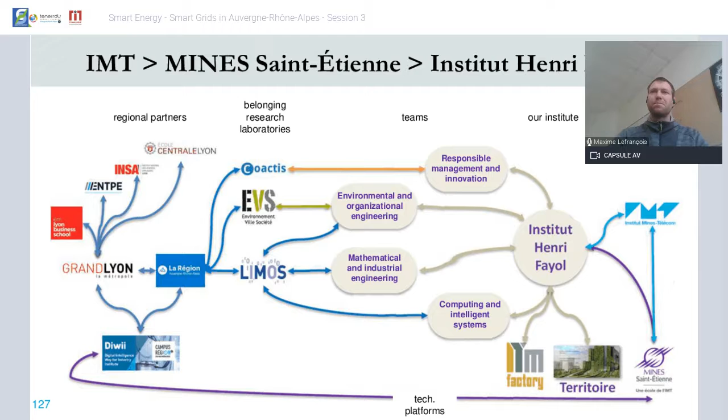We also have two local technology platforms. First, the territory platform. What we call technology platforms are labels and a platform where we can make research projects raise their TRL level until the state where they are ready to migrate to spin-offs or created startups.

This territory platform has one startup recently created, called URBS, and I will present a solution from this platform in the next slide. This territory platform is an innovation platform for, in general, territorial governance solutions. We are focusing on buildings, logistics, mobility, and environment.

The goal is to support, in general terms, spatio-temporal decision-making in territories. We expose modular and evolutive applications that target heterogeneous domains. On the environment aspect, we anchor on the United Nations Sustainable Development Goals.

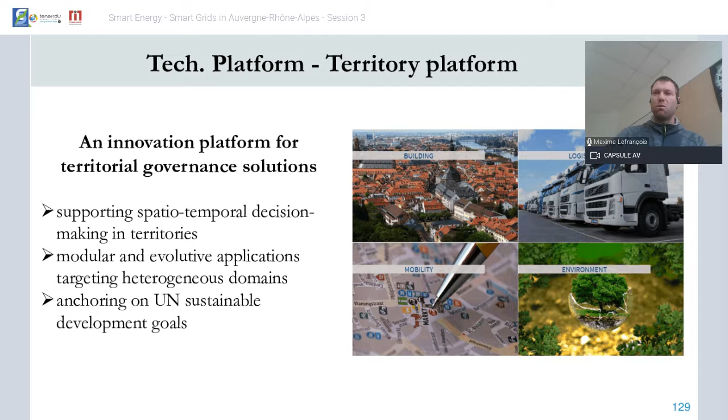One example of a solution that went through the TRL raising process is the IMOPE solution. It is built on huge data sets of indicators at the address level, including geolocation, cross-referencing, reconstruction, and reliability of territorial data qualifying the housing stock. This includes geographic information, cadastre, areas of interest, census of populations and localized income, land and tax files, energy data, and specific data.

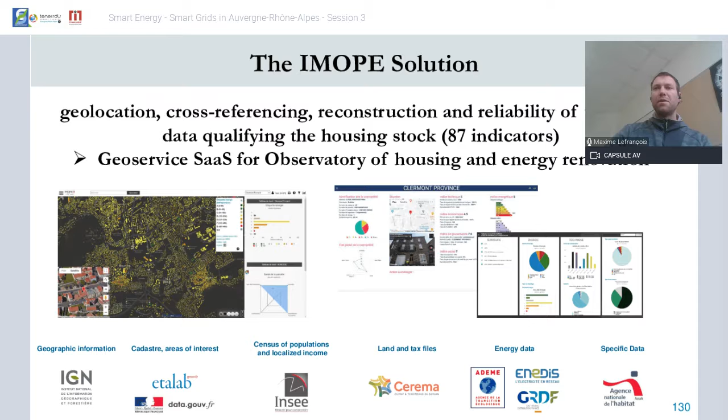The particularity is that the data is either obtained from open sources, from partners, or reconstructed using AI techniques. There is a platform to visualize the different indicators. The goal of IMOPE is to help the deciders plan large-scale energy renovation of buildings and housing.

We have a pilot that is actually our own building. We are located here at Espace Fayol in Saint-Etienne. So this is not the historical site of École des Mines de Saint-Etienne, but it is the formerly Manufrance building—the most ancient of among us French people would know about Manufrance. What we have in this building, we ambition to make it a candidate pilot smart building.

For any new collaborative projects that we could be part of in France, in Europe, or even regionally. So what we have is a web-based, linked data building model for this. We have control of our heating, ventilation, and lighting, originally with Instabus. The installation was from 1994. Instabus was created in 1989, I think. And now we have KNX net over IP control on that.

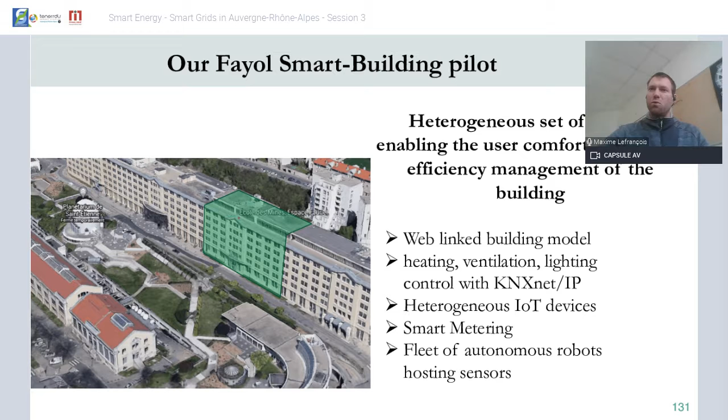We have access to our consumption data, obviously, and we are also working on autonomous robots that can move on the stories and make measurements in different locations, or connect to an isolated Bluetooth device and send messages, for example.

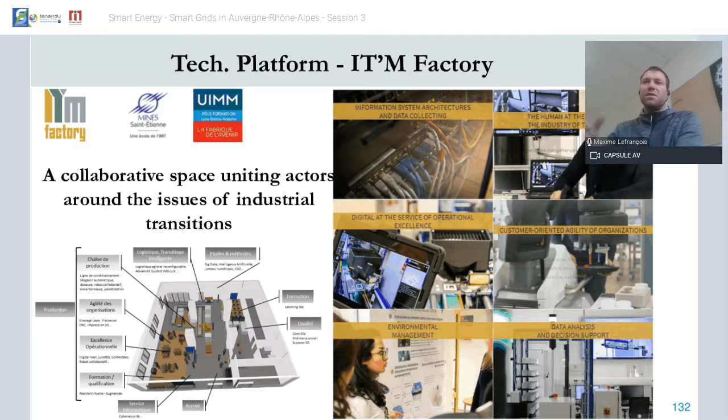The second technology platform that we have here locally is on the ground floor of our building. It's called IT'M Factory, and it is a collaborative space aiming at uniting actors around the issues of industrial transition. So we demonstrate here some technologies that we consider the industry of the future, and we organize formations for SMEs to decide whether or not they want to move on in this direction in the digitalization of their company.

So some examples of collaborative projects that we worked on—I give here a very small subset of these projects that we have. Mireille Batton-Hubert from the Applied Mathematics Department will give a focus on another project on April 1st, I think the last edition, the last workshop in this series.

I was recruited personally in 2014 after my PhD that was on applied linguistics, on knowledge representation for applied linguistics, on a Eureka ITEA project called SmartEnergy Aware Systems, which was quite ambitious. Its general goal was to design and develop a global ecosystem of services and smart things, collectively targeting the stability and efficiency of the smart grid.

This project was led by ENGIE and involved 34 partners in 7 countries for a total budget of 16 million euros and 160 person-years. It ended in 2016 and received the ITEA Award of Excellence for Innovation and Business Impact. And there are some follow-ups on this project.

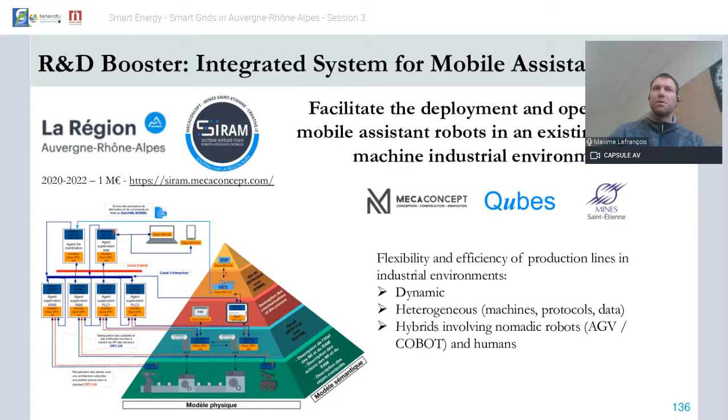Following these different and in parallel with these collaborative research projects, one of our strong points is that because we are targeting semantic interoperability, and because semantic models gain value with the size of the community that uses them, we are strongly involved in standardization efforts on the Internet of Things, in smart networks, in sensor networks, and on BIM, the building information model.

So one example, one outcome of the SEAS knowledge model design, was to contribute to the Semantic Sensor Network (SSN) ontology from the Open Geospatial Consortium and the World Wide Web Consortium. This is the standard ontology for representing sensors and actuators on the web, and the observations or actuations that they make.

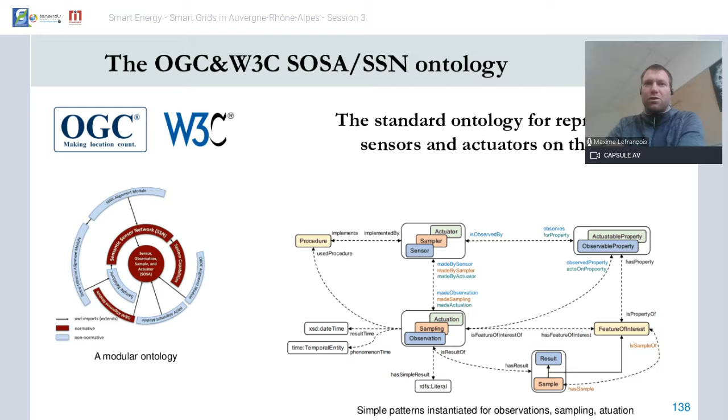We are also very much involved in the development of the Smart Applications Reference Ontology at ETSI, the European Telecommunications Standard Institute. SAREF is the European shared model of consensus to facilitate the matching of existing assets in the smart application domain. It is based on patterns that are under construction, and then you have SAREF core and extensions for different verticals.

Some extensions exist for energy, environment, building, smart city, manufacturing, agriculture, automotive, e-health and aging well, wearables, and water management. We are currently working on an extension for smart lifts.

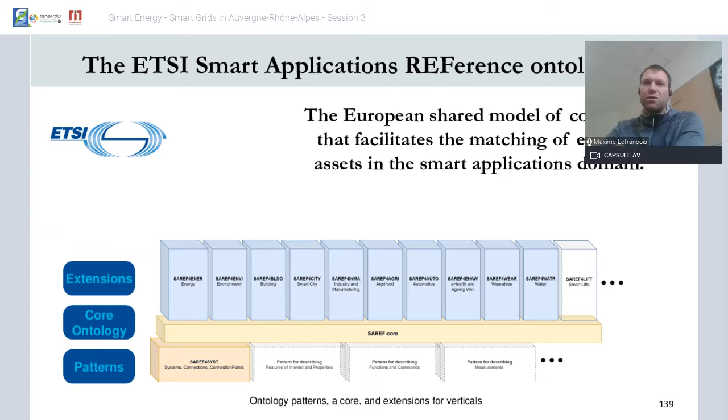In SAREF, we contribute to the development of the knowledge model development framework, workflow, and documentation portal. So even if we researchers don't have expertise in all these domains, we demonstrate how contributions can be taken from those who know the domain, and automatically generate a high quality knowledge model that is also automatically published, including the documentation.

At the W3C, I was also co-chairing until recently a community group called the Linked Building Data Community Group, and one of its productions is an ontology called the Building Topology Ontology, or BOT, which is a simple ontology for leveraging web principles in building information models.

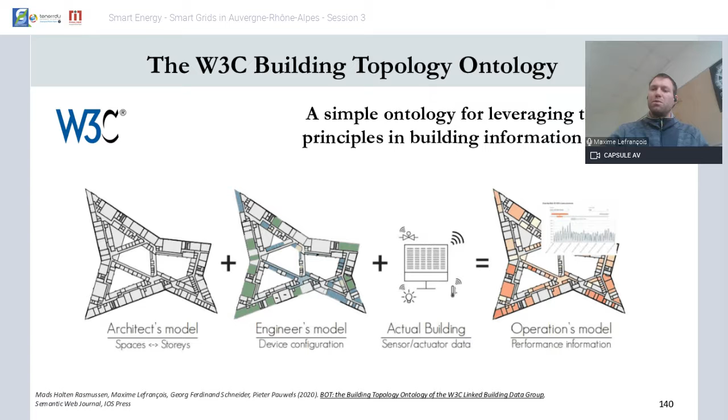The idea is that with the IFC, which is the standard data model for building information models, you would want to integrate the architect model, but also the engineering model and the actual building data, and the operations model, like the actual sensor measurements that you can have, all on the web in a way that is compatible with BIM, so level 3.

We recently recruited a new associate professor called Victor Charpenay, who was very much involved in the development of the working group on the Web of Things at the W3C, which developed a set of standards for solving the interoperability issues of different Internet of Things platforms and application domains.

One of the key productions here is the thing description model for smart things, where in a nutshell, a thing deployed on the web, no matter what communication protocol it uses, would expose properties, actions, and events that you can subscribe to. The thing description aims at enabling you to discover things and interact, knowing automatically how to interact with them. We are interested in merging the multi-agent domain and autonomous agents on the web with the IoT, using Semantic Web technology.

So I will conclude here. I aimed to introduce the Institut Fayol at MINES Saint-Etienne, which is a pluridisciplinary and complementary research institute. I gave a focus on AI research. We have technology platforms at hand and a smart building pilot. We have experience applying our research in different verticals, including smart grids, smart buildings, and smart territory, and we are also contributing to international standard development organizations in semantic interoperability for the IoT.